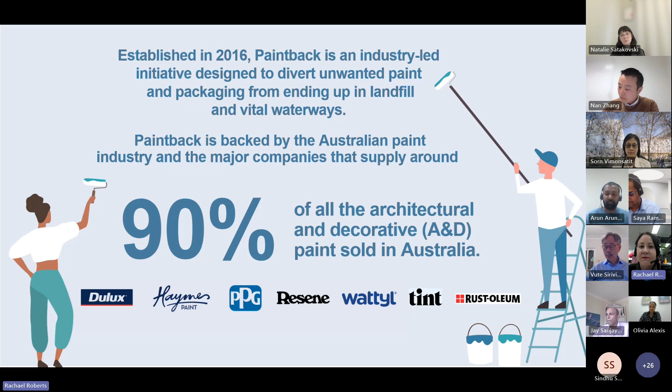So we were established in 2016. We're an industry-led voluntary product stewardship scheme. So you can see on the bottom of this slide, we're led by the major paint companies in Australia. And essentially we cover about 90% of all architectural and decorative paint sold in Australia. We're headquartered in Victoria, where we're also building a large-scale facility to repurpose paint for new products, including the product that Jay and Nan are researching at the moment.

We essentially service 85% of the national population by distance. So that means about 85% of all Australians have access to a Paintback collection point. Our target to divert landfill is 90%, which also includes the packaging. So we accept water-based paint, solvent-based paint, which is housed in either plastic or steel containers.

We've got good acknowledgement with Australians, particularly those that are pretty heavy on DIY and trade painters. So 1 in 5 of Australians know of Paintback and the scheme. And half of the people who have painted in the last 12 months have used the scheme to return their unwanted paint. So we're very proud of what we've essentially established for this very difficult to find reuse stream.

How does Paintback work? So DIY, so you and I, when we're doing a bit of a renovation project or a refresh coat of paint, we essentially take our unwanted paint to a Paintback site. Those are typically council transfer stations, although in New South Wales they also offer pop-up events. The unwanted paint and packaging is stored at the collection point and we pick it up. We then essentially transport it to an aggregation point where we sort by the different types of paint.

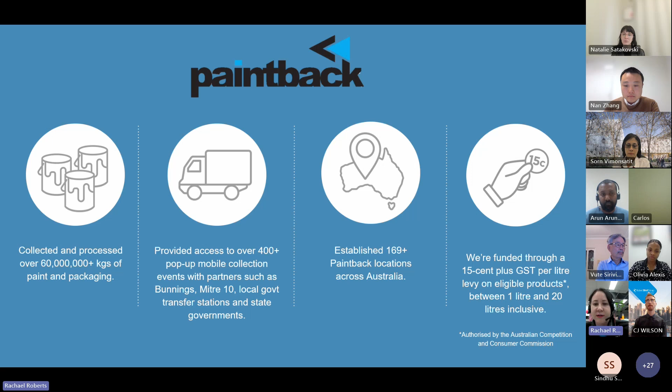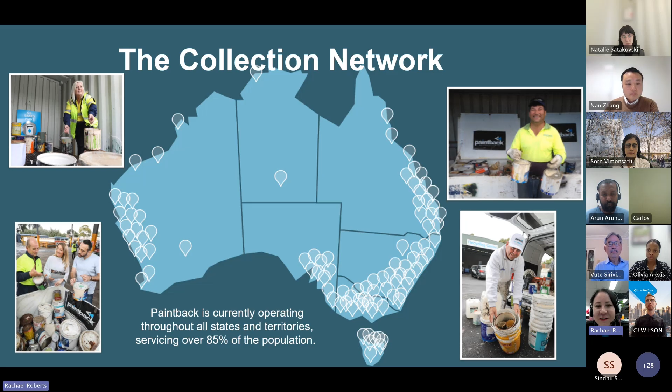So R&D is really at the centre of what we pursue. Whilst it's all well and good to collect material and divert it from landfill, we do really need to identify good uses for that material. So our project with Swinburne is focused on the water-based paint stream and whether we can use that in concrete.

I'm very lucky and thankful that I've got an R&D advisory committee, which is full of experts from cross-discipline engineering, and they provide the steer on research projects. Essentially, do they make sense technically, but also do they make commercial sense? So for us, it's really important that anything that we develop does yield a commercializable outcome. So we like to see it out in the wild and beyond the lab.

We do have a pilot plant. So last year we had a pilot plant at Manufutures Deakin Geelong, which is really important for us to be able to produce material that's representative of what we're building in our larger scale plant.

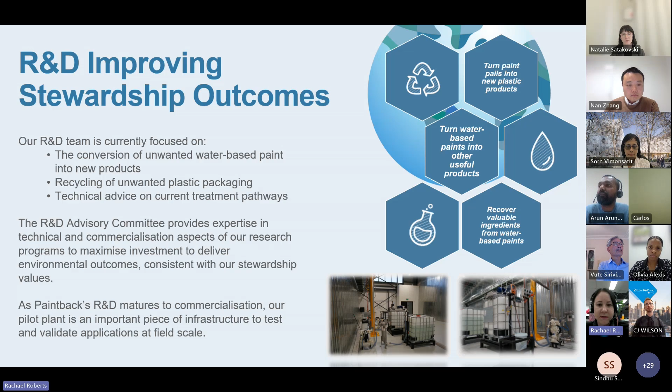So our project was with SmartCrete CRC, and we're very thankful to have SmartCrete support and the researchers' support in unlocking a better use for paint. But we essentially want to determine, does paint offer any value adds for concrete? Can it displace any materials, and can it improve any of the performance characteristics, including durability? We're then looking at commercializing the research with good industry partners that have a shared vision to unlock sustainability and performance enhancement to concrete mix designs.

And I won't steal Jay's thunder because he will hone in more on the research and what we've discovered to date.

It's very exciting. I'm sitting in our new plant, which is dubbed PACE HQ, or Paint Circular Economy HQ. So one thing that's quite vital to the success of commercializing any research project, particularly the one that we have with SmartCrete, is being able to produce the material en masse and make sure that it's consistent. So we're just in the throes of constructing a large-scale plant that will essentially take all of Australia's unwanted paint and then separate it from its packaging and allow us to divert all that material from landfill through different avenues.

We also do have paint as paint at the moment. So through that, we essentially avoid 15 kilos of CO2 per 100 litres of recycled paint. So it avoids the requirement to extract resources to make brand new paint, but also the imported materials. So it's actually really good to recycle paint because it is quite a carbon intensive material to produce.

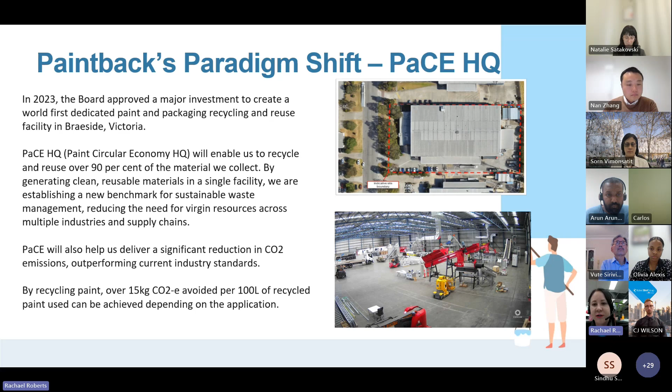Unlike other product stewardship organisations, we're quite lucky that we do have really strong industry and sector support. And we've essentially learnt that by becoming part of the supply chain for recycling paint and packaging, it means that we can really control the quality of our feedstock a lot better and understand where it's coming from, but also what applications it's ending up in.

Here's a bit of a circular economy diagram. So the circular economy underpins everything that we do. We really try to find beneficial uses for all the materials that we receive beyond water-based paint. We utilize the solvent-based paint as an energy source, and we are looking at different R&D projects, including the one with SmartCrete CRC for the water-based paint. We recycle our plastic material into pails, so you can purchase a 4-litre bucket in Bunnings made using the material collected from the scheme.

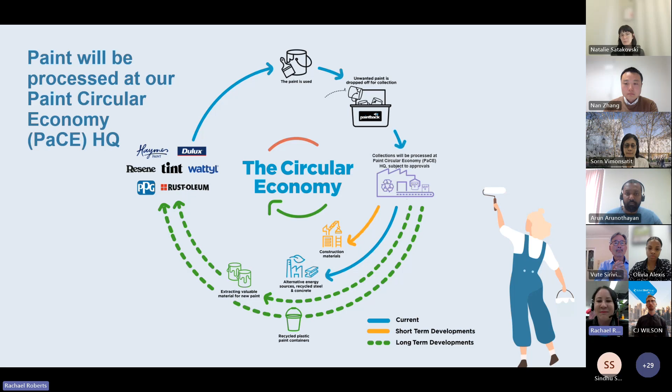We're always looking for industry and research collaborations, so I'm quite fortunate that this room seems to have quite a few industry and research people in attendance. So if you're interested in the research that we're promoting today, please do get in touch, whether from a research perspective or from an industry perspective. We're always looking for problems to solve, and I do believe that paint, being such an interesting material, can lend itself to solving many of the industry problems, particularly in the concrete sector.

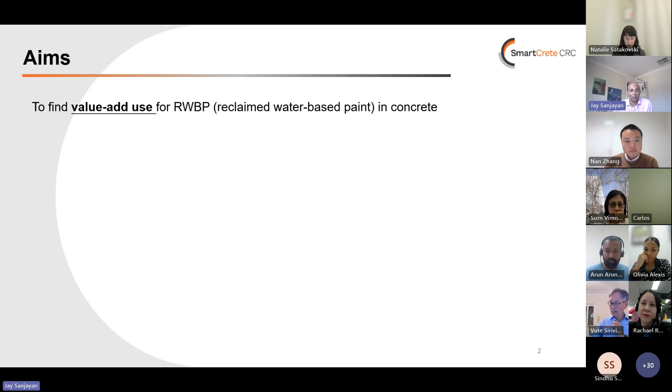Following from Rachael's introduction about the reclaimed water-based paint. That's the terminology we use. So the project aim is to find a value add use for the reclaimed water-based paint, we call it RWBP, in concrete. So because of the time limitation, I'm just going to show some selected results of the research that we have been doing now for more than a year.

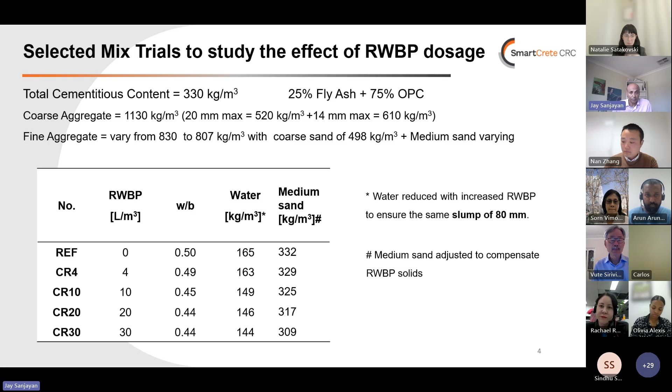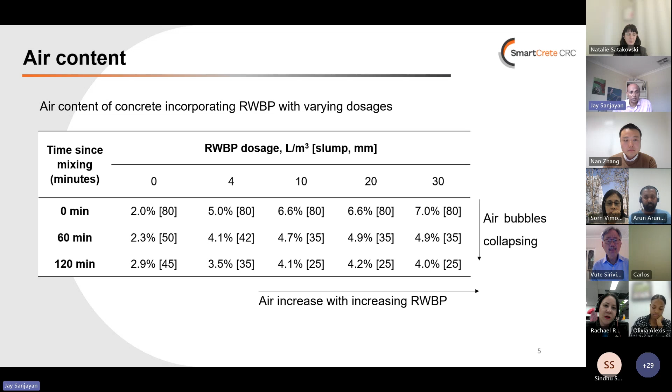So this is the amount of air after we cast the concrete. The first one, you can see there's a slight increase in the air in the concrete if we cast later, mainly because the slump is decreasing, so they introduce more air. But with the waste paint, there's a slight reduction in the air, because the workability is good because we got a lot of air, but the air collapses with time. We are increasing the dosage when we go towards the right, and the air bubbles collapse. So that's why there's some reduction.

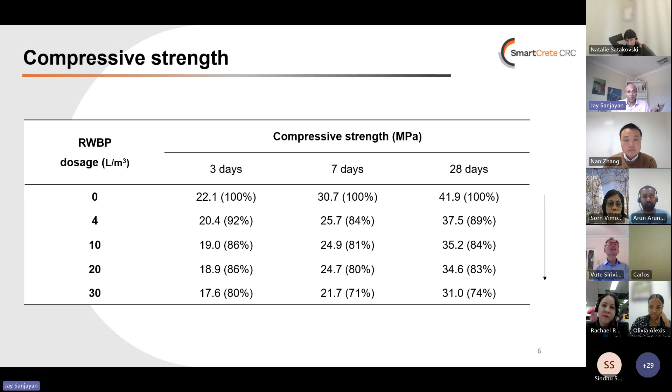I think it's better if you focus on the last column, 28-day strength. This is a 40 megapascal strength mix design, but despite pulling off some water, the amount of air introduced is so high, there is a reduction in strength. So that is an issue. But we put that issue on the side, and let's look at carbonation, which is where the exciting results are going to come.

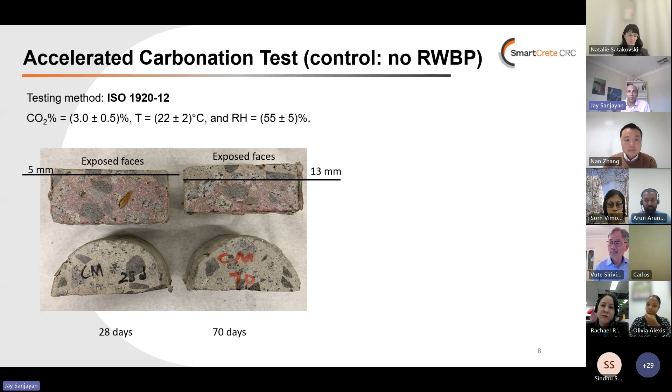What we did is an accelerated carbonation test, following the international ISO standard. Basically we increased the carbon dioxide concentration in the chamber to about 3% with temperature 22 degrees, relative humidity 55. In the control concrete, we get a 5 millimeter carbonation depth after 28 days, and after 70 days we get 13 millimeters. So that's equal to maybe 20 years of carbonation.

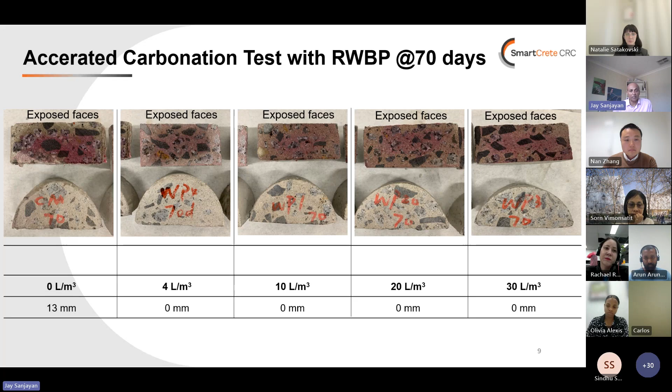But when we did the same with paint, after 70 days the carbonation effectively didn't happen. You can see with the 4 liters, 10 liters, 20 liters, 30 liters, the depth of carbonation, we could not detect anything. So we did some pH tests, because what we can see is a slightly reduced color. The uncolored area at the top is carbonated, the colored area is not carbonated. But with the concrete containing paint, you can see it's not a clear cut.

So we did a pH test. You can see the colored area is between 9 to 10 pH, and when we increase the paint dose, the pH is higher. But it's not as high as 11.5, which is what we have in concrete when it's uncarbonated. So there's a slight reduction of pH, but not as much as the normal concrete that's gone down to 7.5 to 8. So the pH is remaining high, but not at the same level as 11.

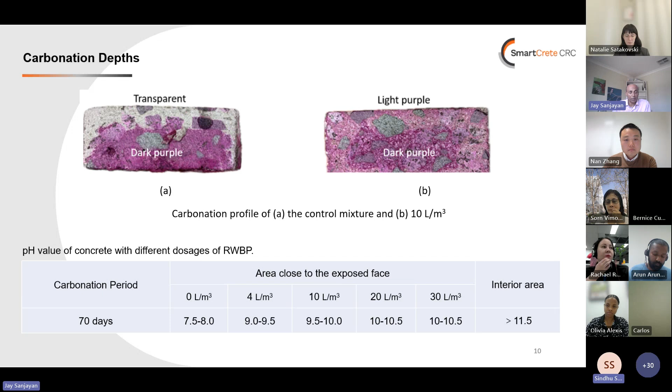So even though we say there is no carbonation, there's a slight reduction in pH, but it is not enough to cause corrosion of steel, I must say. So the carbonation depth decreased with increasing dose of paint. That is the conclusion from this part. But where can we use this result?

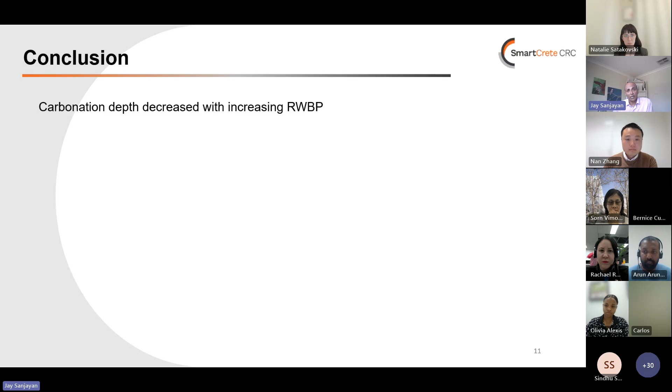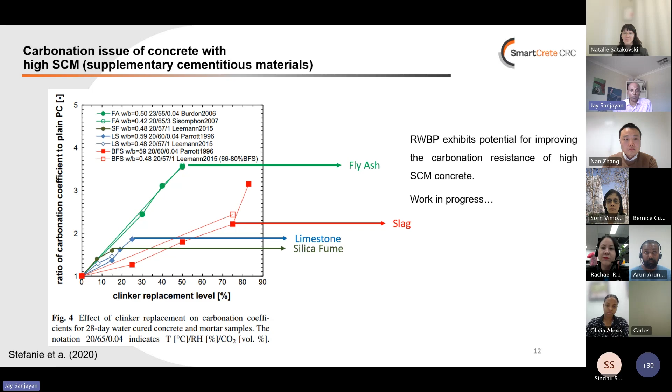We also did some work on sorptivity, and you can see the absorption period up to 56 hours, I think we did. When we add paint, the water absorption into the concrete decreases. That's what you can see from this slide.

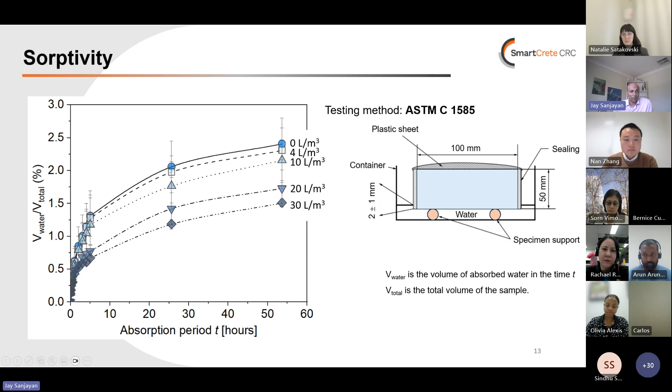And drying shrinkage, that's another big issue often in concrete. And we can see a beneficial effect, from 0 to 4 liters, 10 liters, 20 liters, 30 liters. We measured shrinkage up to 70, 80 days, but normally it's only required up to 56 days. So you can look at the 56-day results.

You can see the results: the 40 MPa concrete had 500 microstrain, reducing all the way down to about 300. So it's a good concrete to start with, at 500 microstrain. We can still get a significant reduction in shrinkage, which is another great benefit.

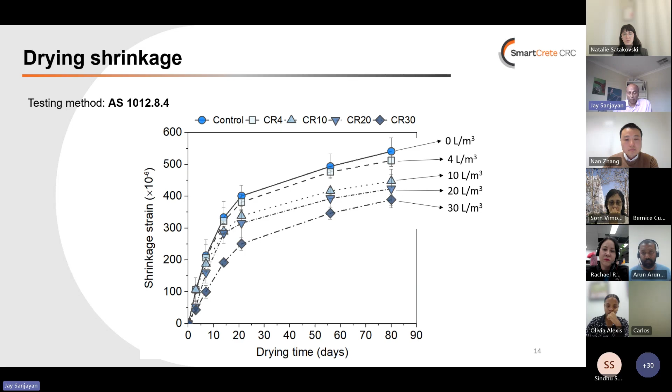So we have shown carbonation resistance and reduced water absorption, which links perhaps to chloride resistance and other bad materials that go into the concrete to attack it. They have water as their transport agent. So if the water is penetrating less, that's going to be beneficial for durability, regardless of what the attack is. So understanding the reasons and mechanisms for this is important.

So let's look at a concrete under the microscope. We have open pores, and we also have closed pores. The closed pores are where water cannot get in. And this capillary force is defined by this equation. You may not have come across this, but one of the important factors is the contact angle between the solid and the liquid that defines the capillary force.

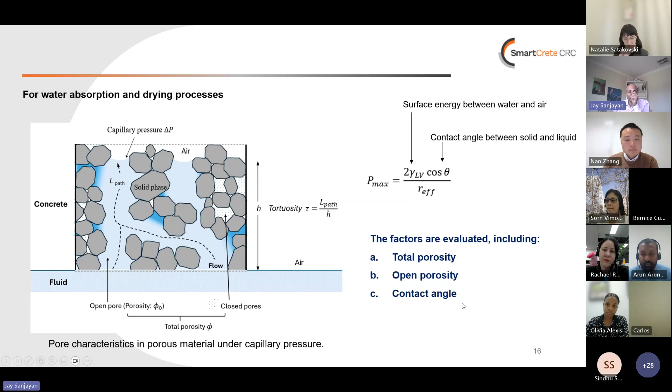The others remain constant regardless. And the R effective, the parameter at the bottom, is related to the porosity. It's the radius of the pore. So we measured the total porosity by scanning the concrete and doing an image analysis. That method has become quite popular. That measures the closed porosity and open porosity.

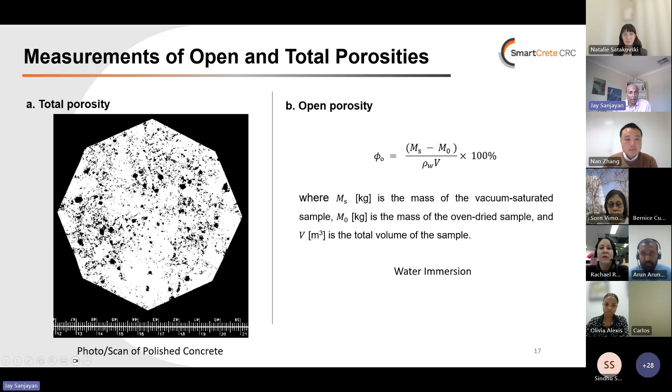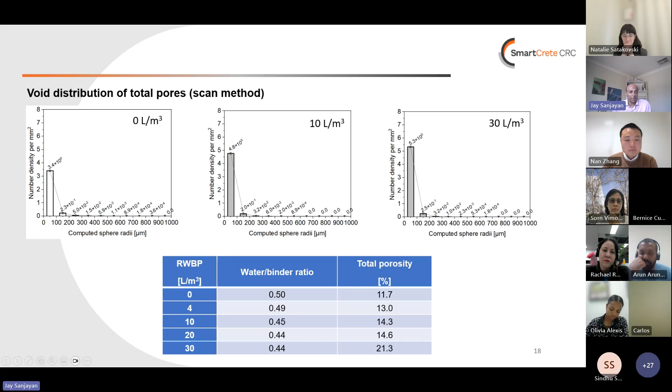And the open porosity is measured by water immersion. We immerse it in water and calculate how much water is absorbed into the concrete, and the water only gets absorbed into the open porosity. And this is the pore size distribution we got. You can see when we increase the paint dose, the large size pores increase. And so the total porosity increases with increasing paint dose.

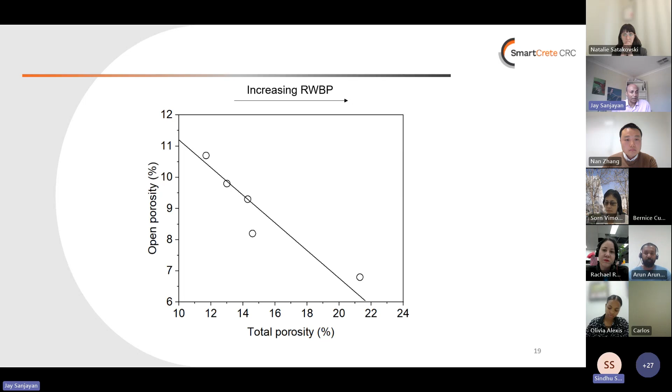But the most interesting thing we noted was that the total porosity increases with increasing paint, but the open porosity drops, which is unusual, because normally when total porosity increases, open porosity increases too. They both increase the same way. But with the paint, we are observing an opposite effect. It's a similar graph here.

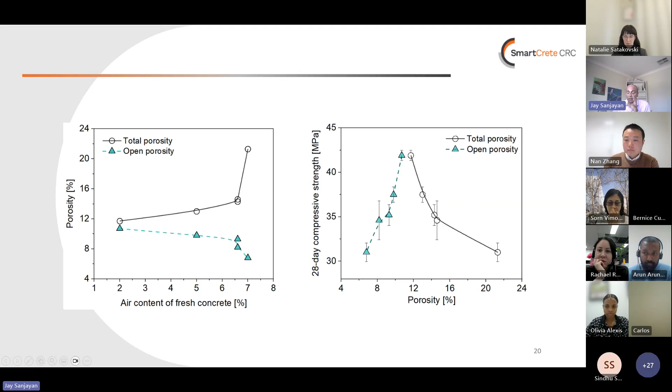You can see when the air content of the fresh concrete increases, that is with increasing paint, the total porosity, which is the top curve, increases, but the open porosity, which is only part of the total porosity, is actually decreasing. Again, if you look here, the curve with the circles, the total porosity, increases and the strength decreases. But at the same time, the closed porosity increases. So this is an anomaly we found, and that might give some explanation.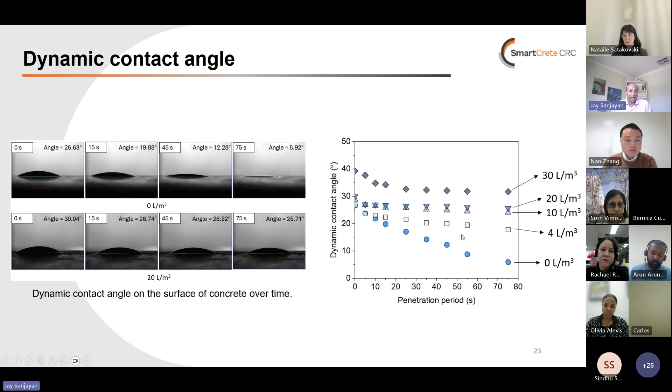That is the first picture you see on the left-hand side. But with increasing amount of paint in the concrete, you'll see that angle change. And that is the major reason: because the angle increases, this factor decreases, because that's the cosine of the angle. So that means the capillary pressure decreases.

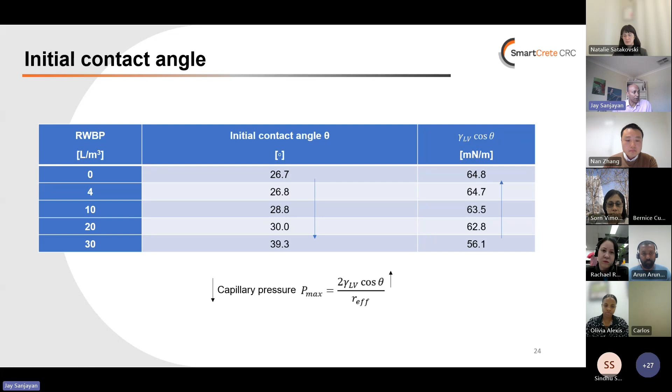So in conclusion, we can say that the water-based paint increases air, which leads to a reduction in strength. Open porosity reduces with increasing paint, which subsequently reduces water penetration, water absorption and drying shrinkage, and the paint also increases the contact angle, which has an effect on water absorption and drying shrinkage.

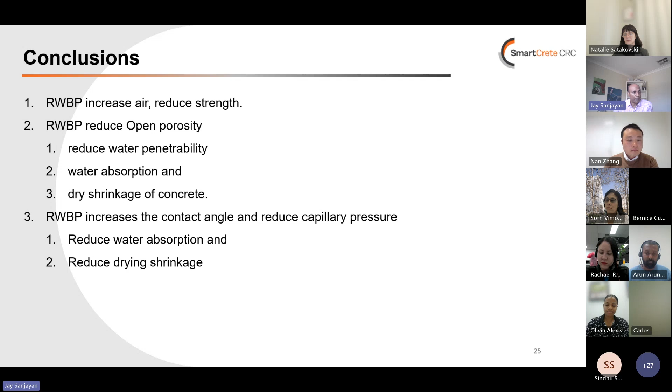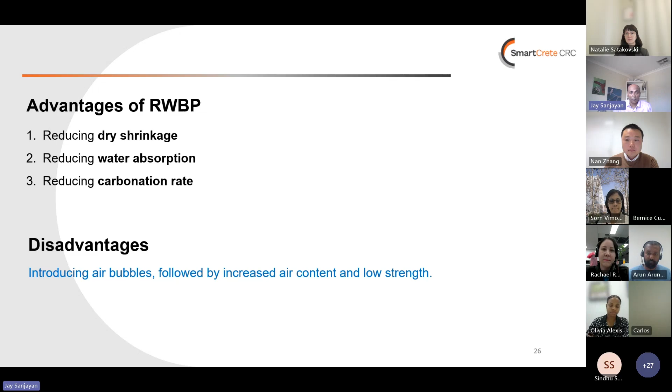So the advantages are drying shrinkage, water absorption, and carbonation rate. The main issue that we need to address is the strength reduction and the air content. So we have done some other research to look at the mixing speed: if you have a low mixing speed, we have low air. Also, if we have finer aggregate grading, that also increases the air, so we need to make it a coarser grading.

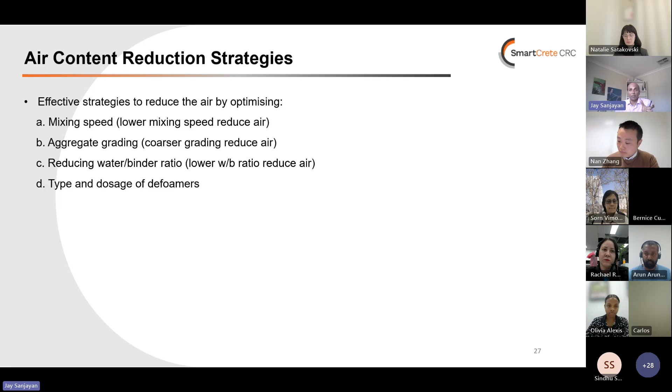Water binder ratio decrease, the air decreases. But I think the main work we're focusing on is using defoamers to destroy the air in the concrete, so we have tried different defoamers, and we have been successful in achieving that. So I think the discussion we want to have is about the carbonation resistance and how we can find potential uses for the paint in the concrete industry.

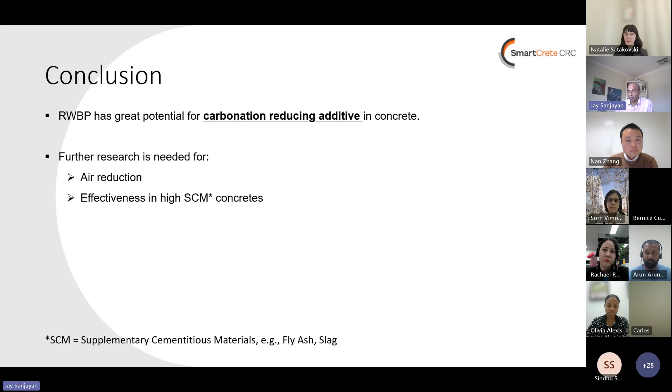Sorry, I took too much time. That's perfectly fine, Jay. It's a great presentation.

And as soon as you say carbonation, and when the pH is above 11 or about 10 close to the surface of the concrete, as soon as people see there is less cover needed for the rebar, where I work in the precast industry, they just love it. They just want to have some taste of it. So the results look really interesting, and from that I want Olivia to join me and we open the questions to the floor.

Because I have the privilege of being the chair, I have a few questions and I'll start with Rachael. Rachael, I once believed waste paint comes in different colors as in paint. So I think that is not true. What are the common misconceptions you had about paint recycling and Paintback? How does Paintback address them?

Yeah, whilst color, obviously paint comes in a range of colors. Typically, we receive mostly white because, as you can imagine, most people paint their ceilings white. En masse, there's a lot of white paint in circulation. And one of the common questions, particularly around these sorts of uses of paint, is will this affect the color of the concrete? And the answer is no, because when you blend all the paint together, it tends to be almost like a concrete grey. If you can think of an average color, it is concrete grey.